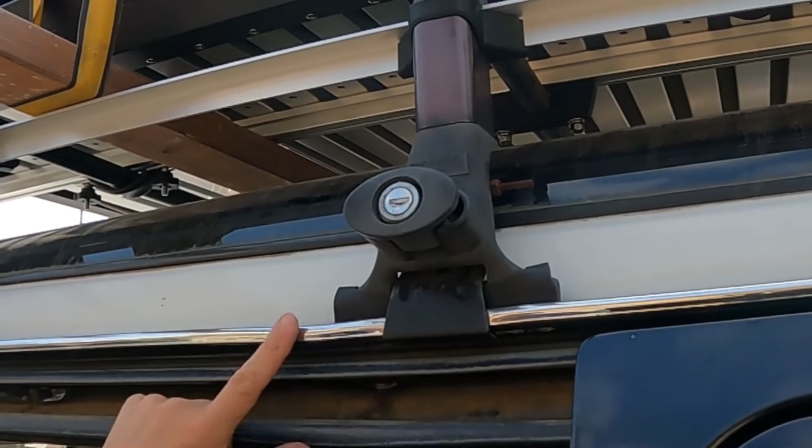And with just the 2 Yakima racks on there, we also did quite a bit of damage to the gutters on the van. So this side of the van, you can really see the damage right here on the gutter, and this is actually a fairly common thing. You can see the gutter's been pushed down in the front and pulled up a little bit in the back. It's happened the same back here as well, where the gutter is a little bit twisted.

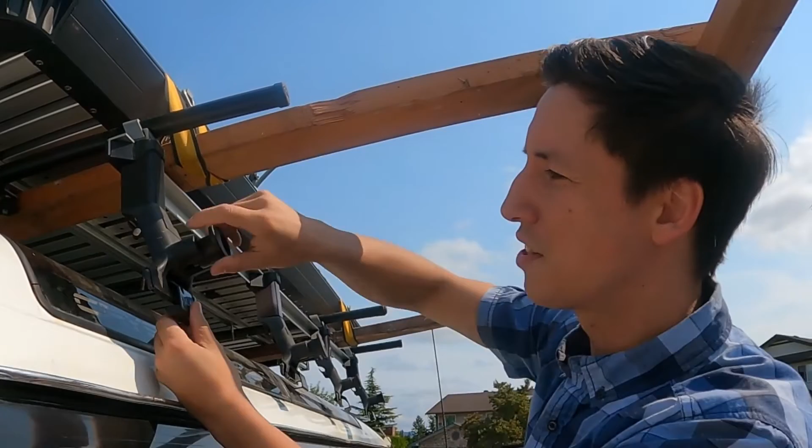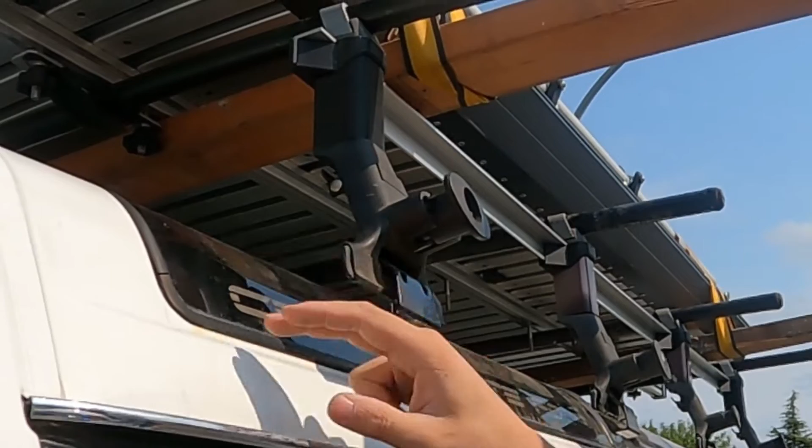Second issue with the Yakima gutter mount rack, it's a little less obvious but still a very big problem. The Yakima gutter mount feet use a sliding bracket in the back here to actually clamp onto your gutter. As you tighten it down, this bracket moves up and inboard, so it clamps both this way and this way on your gutter. Now the design is simple, it's effective, but the problem with the high roof is there's not a lot of clearance between your glass, the metal, and that bar. So as you crank it in, this moves back and ends up resting right on the metal and right on your crystal light. That's why right now I've got this thing braced up, to get them to properly clear the glass without making contact. And we've also had to modify these brackets a little bit.

Okay, so now that we've got this off, I can show you a little bit closer the actual foot assembly. Now you can pick up these Yakima racks for dirt cheap on Marketplace, Craigslist, even the wrecker, you'll find them quite often, because they were all over the place when cars had gutters. Now that they don't, people are basically giving these things away because they're just taking up space in their basement or the closet. But what you will find is most of them are going to be far too low to fit onto your high roof, and that's because obviously they came off of a car.

Now the racks themselves are a multi-piece setup. You've got your foot, then there's a saddle, and a clamp that sits on top. Obviously those are still sitting on my van, but hopefully you get the idea. Because they're a multi-piece setup, that means you can space them out. Now Yakima does actually offer a spacer kit, which lifts the load bars up about 3.5 inches from their factory setting. I have 2 aluminum ones on the vehicle already, but the next rack that I bought didn't have the spacers.

So I just hopped on my 3D printer and made some new ones. Now I know what some of you are thinking - a 3D printed part holding all that weight, there's no way it's gonna work. Well, 3D printing does work for a lot of things, you just have to be very mindful of where the forces are. Because this is being sandwiched between the foot and the saddle, these parts are all under compression. The rest of the load is all being put into the bolt here. So all this needs to do is be able to support weight straight down.

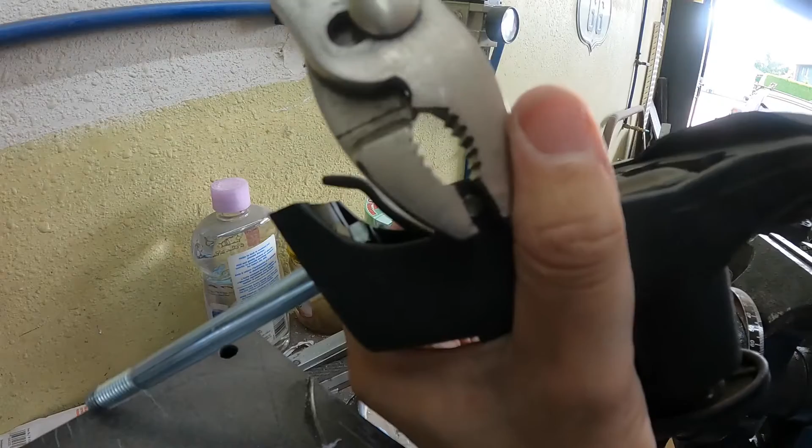So now that we have this out, you can see the shape, and you can see how much this actually comes down and this section goes in. Now, for most cars that's not a problem because this ends up above the roof, but with the Delica, obviously, it's not gonna work.

So what we need to do is try and flatten this out. All I'm gonna do is take a rag, wrap it around there, and clamp it in a vise.

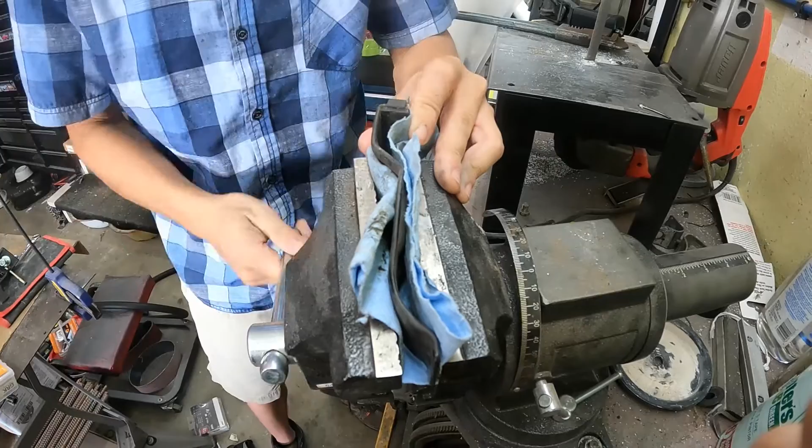Now, we're not trying to go crazy. If you go too far, this actually won't slide down far enough to go over the gutter when you try and install it, and it can be a little bit difficult.

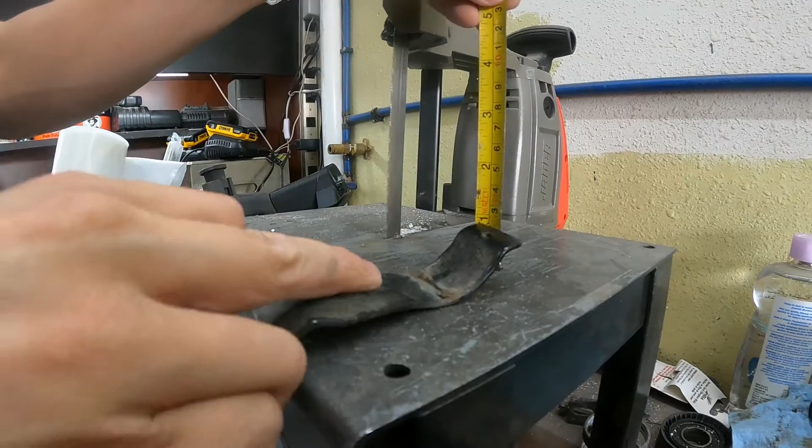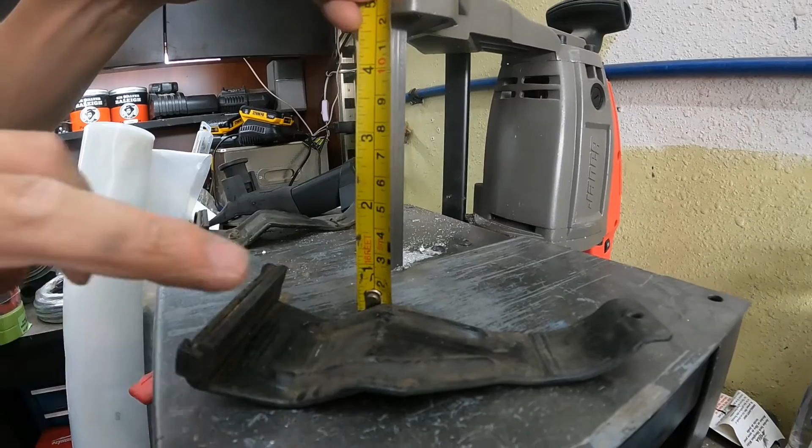So here's our original bracket, unmodified. We're at about 2 centimeters to the top here, and at the corner about the same. Now our modified bracket, you can see the corner we've taken out quite a bit actually. We're down to 10 mil here, and about 15 mil on the end.

So all that's left is to reassemble. And if you're modifying these to fit the blocks, remember, you are gonna have to change that bolt.

Then we can go ahead and reinstall our freshly modified bracket. Make sure that we have the retainer threaded all the way out. Slide the bracket in place, and if you were able to grind the end off without doing too much damage, we can now reuse this.

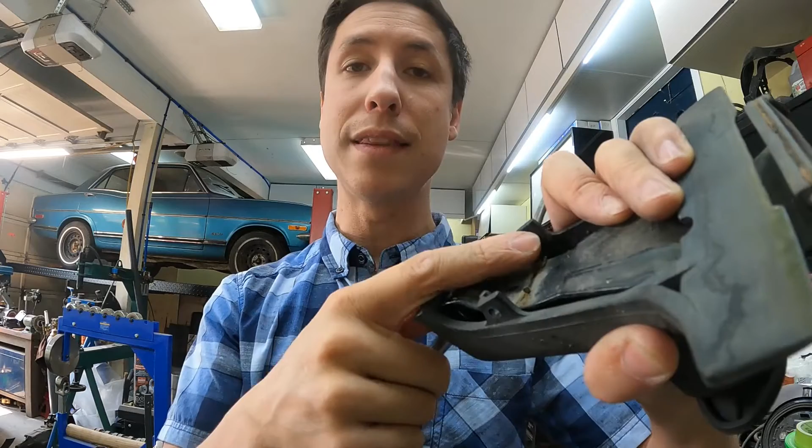If for whatever reason these pins are no longer reusable, you'll have to remove it and replace it with a nut and bolt. But I think we should be good with these ones.

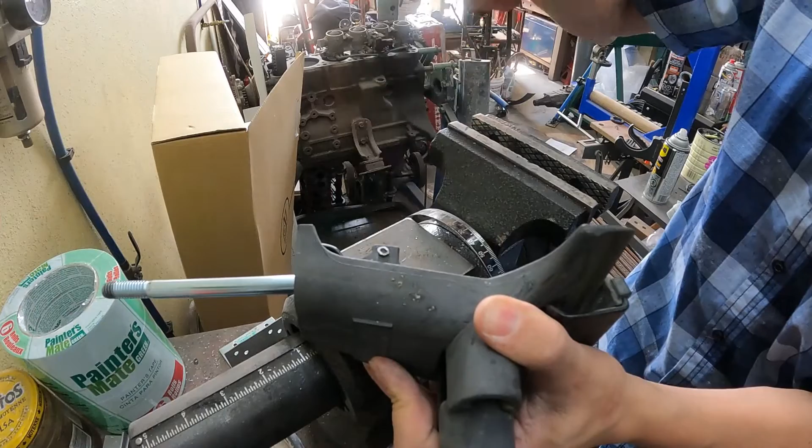Push it back through, and then I'm just going to place it down on my vise and hit the top with the hammer to try and mushroom it over again. Alright, and that's it. We're done with that section.

So now, let's take a closer look at those riser blocks. Now, these are the riser blocks that I made. Yakima does have riser blocks, but they don't come up all that often, and they're pretty expensive to buy new. Hence, I opted to make my own.

Now, the block simply slides over, and if we were doing this the way Yakima has set up, you would simply take your saddle, put it on top, then take the bar retainer and clamp it all together. But the problem with that is, again, the round bar.

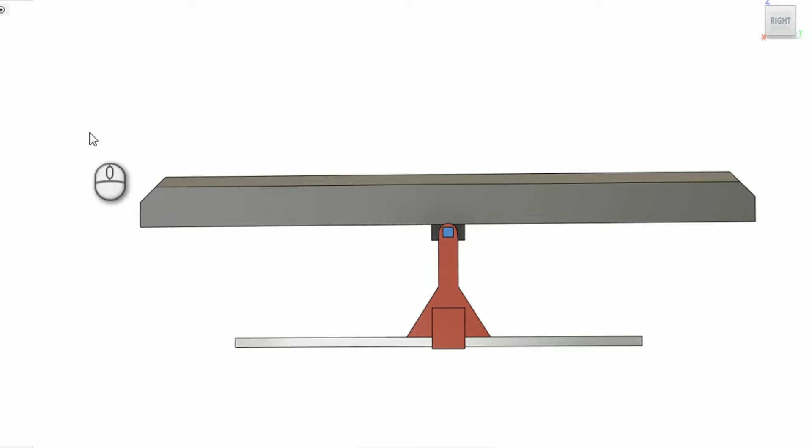Now let me show you what I mean. Unfortunately, I don't have a foot assembled to show you, but I'll try my best to explain it anyways. I've done this up in CAD to give you a better visual representation of what I'm trying to explain. So we have our gutter at the bottom, our roof rack foot, our load bar, our attachment clamp, and our attachment. And basically, what this all boils down to is Newton's laws of motion.

If we look at the law of inertia, an object at rest wants to remain at rest, and an object in motion wants to remain in motion. So how does this come into play? Well, if we're driving along at, say, 50 kilometers an hour, and we hit the brakes, the car, meaning the gutter down here, wants to stop. But our rooftop tent wants to keep on moving forward.

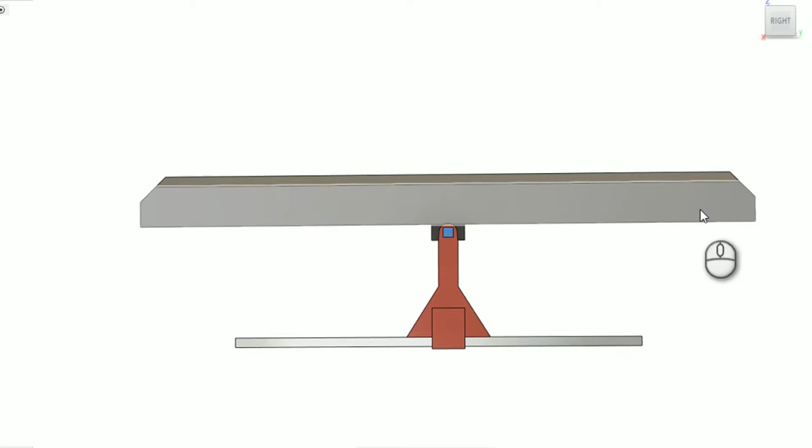Now, with the square bar, this isn't really a big problem. If you slam on the brakes and your tent wants to keep moving forward, it can, but because of the square bar in the square hole, we don't have any rotation, the entire foot just wants to slide forward on the gutter.

Now, obviously this isn't ideal, it's going to scratch up your gutter, but it's probably not going to do anything more. However, with our round bars like our Yakima, this force acts a little bit differently.

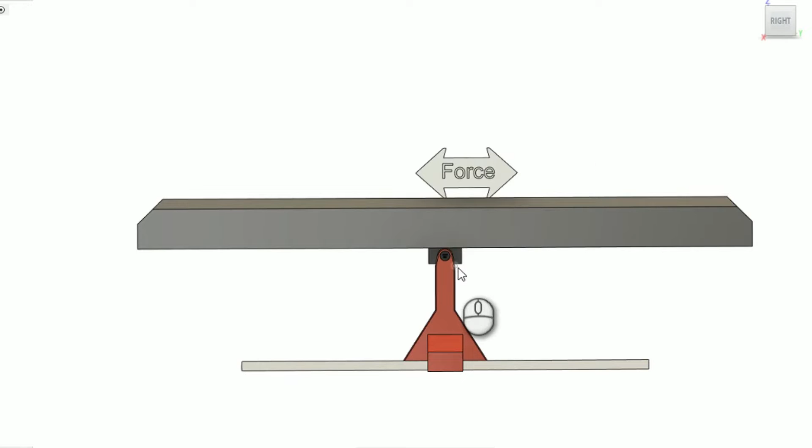So now, in the same scenario, if we're driving along at 50 kilometers an hour, and we have to slam on the brake, that tent wants to keep moving forward. But because we have a round bar here instead of square, it acts like an axle, and you can see the motion that we end up with.

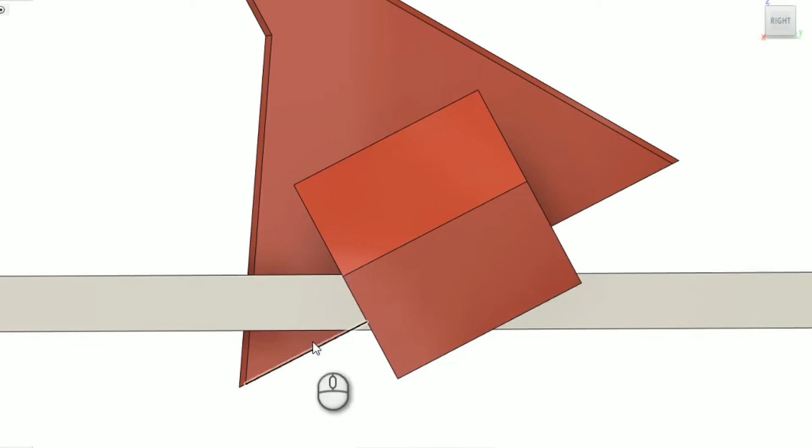The tents move forward, our load bar has twisted inside the foot, and our foot, in turn, has now twisted on the gutter. Now you can imagine what this kind of angle would do if this was actually attached to the gutter. We would have bent the gutter up in the back, pushed it down in the front, and ended up with a real big mess.

The more this happens, each time you accelerate, it goes back. The more you brake, it goes forward, and we end up with this walking motion, and eventually the gutters just get completely destroyed. So I had to come up with some kind of solution to combat that rotation.

Now I could have just put on square bars, and that was one option, but at the same time, if you're going to use square bars, then why not just get a rack that uses square bars?

And the solution came in the form of this little bracket here. So it doesn't really change the way that the bars assemble. You still drop your spacer right over top of the bolt. The only difference is instead of putting the saddle on and then the load bar clamp, we're going to slide this little bracket on first.

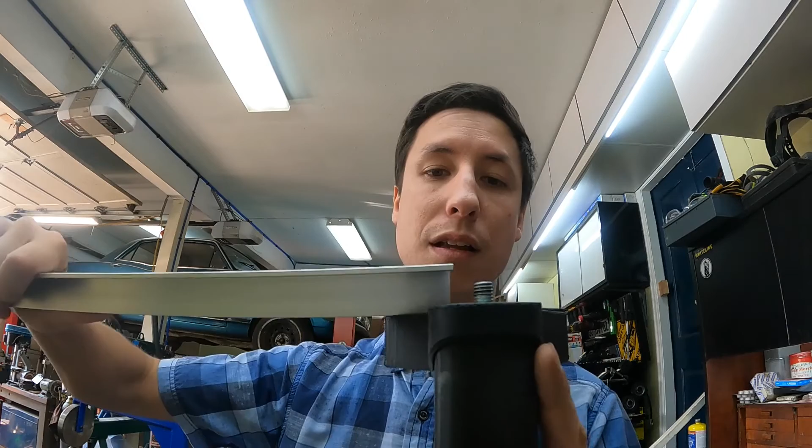Now this bracket does fit onto the OEM spacers or onto the spacers that I made and sits right in place like so, slides right on over. Then we're just going to take a piece of aluminum angle, and that is going to drop into the channel on the bracket. So once assembled, you end up with something that looks pretty much like this.

So how does this work? Well, the problem is that we were having a rotation on the foot. With this bar on here, if we rotate the foot forward, you can see the bar tries to lift.

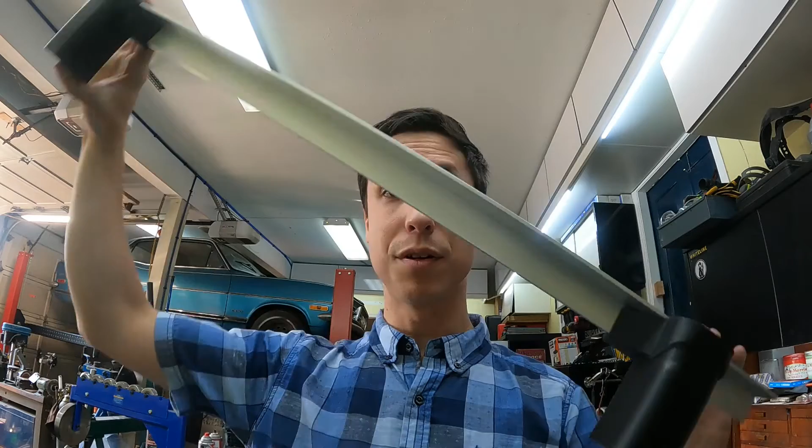Because it's a roof rack, we obviously need a crossbar in the front and in the back. Once we put our crossbar in the rear, we have a full assembly like so. Now when we try and rotate, we're trying to lift up against this back bar as well, and in turn, this back bar, which is trying to rotate forward, is trying to push down on the front bar.

So, by locking them both together, we've now eliminated the possibility of either of the feet being able to rotate forward and cause damage to the gutter itself.

The only thing we need to do now is determine the spacing between our load bars, and then we drill a small hole right here in the aluminum to both allow our bolt to pass through, but also to lock the bar in place to prevent it from being able to slide.

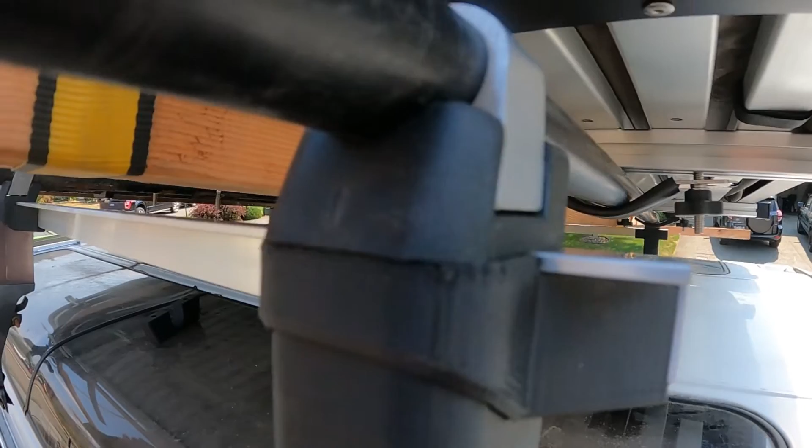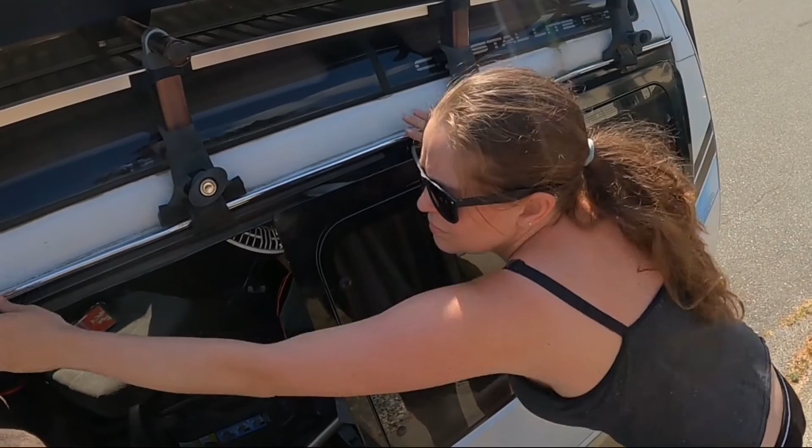And then with the whole system assembled, this is how it should look.

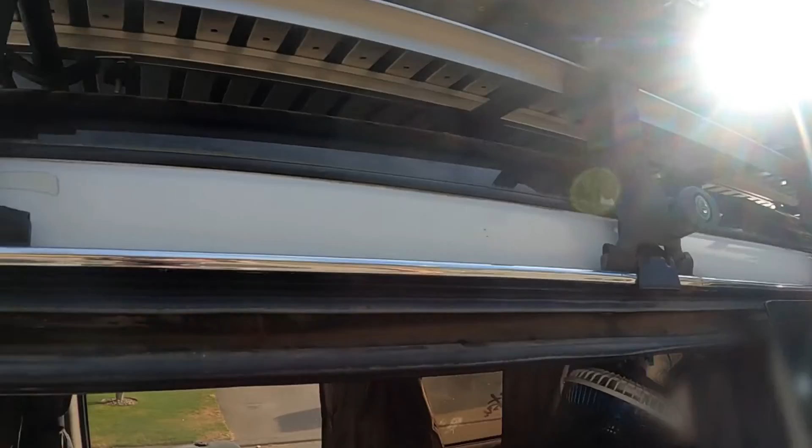So as you can see, we've got lots of clearance now between the rack, the glass, and the rack, and the paint. Because now even if I throw all my body weight into it, the movement is only a fraction of what would have been there before.

So I didn't show you guys how to actually install the rack onto the van, but this video wasn't really about installation. It was about how to modify the rack so that you can safely use it on a Delica without doing damage. Just remember that because the Yakima racks are multi-piece, when you put it up there, it can be a trapezoid. So make sure that everything is square before you bolt the rooftop tent on, unlike what we did, and then had to try and square it up after the fact.

But either way, that's done. So now all I gotta do is pack the van and I'm out of here.